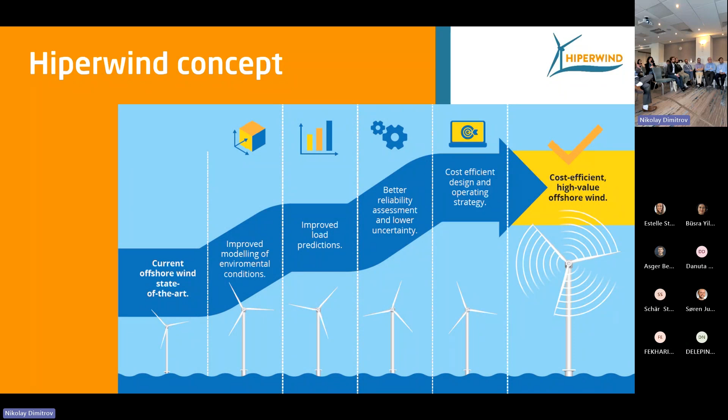And then based on that, you may want to see if you can optimize the design or reduce costs in other ways once you have managed to improve the modeling chain. So uncertainty is the key word, because in any of these stages you want to quantify and reduce uncertainty, or use the knowledge to improve the models that you have.

So when we say uncertainties, why do we think that it can lead to improvements in design? This is really the hypothesis; around half or even more than half of the project activities were based on trying to verify this idea or demonstrate how you can achieve this. We start by thinking that when you have high uncertainty, your design is penalized or suboptimal because in traditional design you need to use safety factors. The higher the uncertainty, the bigger the safety factor normally; that's the expression of uncertainty in traditional design.

Now, if you could somehow reduce this uncertainty, going from this black curve to the black curve with dashed lines, this could mean that you're more confident in your models and predictions. And because you're more confident, you know that you have sufficient reliability even if you allow yourself to have less material. This is one of the assumptions that we want to test and demonstrate. Can you enable the entire process that leads to verifying this and achieving this material reduction? A larger part of the project activities focuses on this.

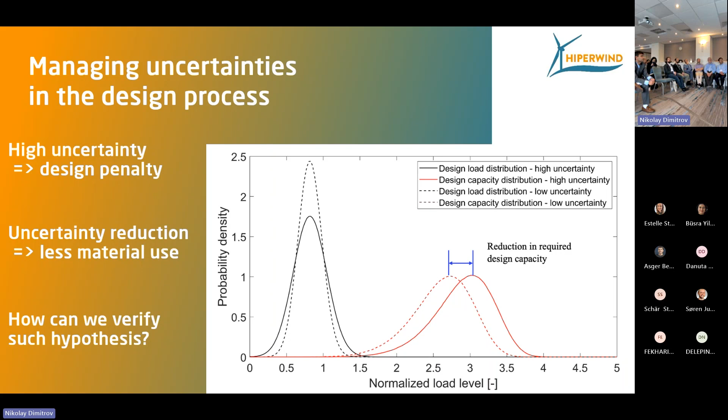And this leads us to the overall objectives. As I mentioned, it's really about reductions in risk and uncertainty, and we hoped this could lead to a 9% reduction. That was the estimate before we started three and a half years ago. You will see later today whether we achieved that; I'll keep this a little bit secret for a few more minutes. We start with environmental conditions, to achieve understanding and reduction of uncertainty in environmental conditions. Load assessment, the second part, has a similar objective.

Then we go to reliability computation, where we want to use the information from environmental conditions and loads to improve the way we compute reliability and use this to change the design. Since we have been looking at the structure and have more modeling capabilities, we also have objectives about optimizing costs, for example by improving reliability and changing the way maintenance is done. If you can predict the reliability of components, you may want to change the maintenance. To do that, you also need models for degradation of components, which was also one of our objectives.

And finally, it's nice to do all this exercise of claiming to improve models in different ways, but it's also very important to verify what we have achieved overall. This is the last objective: cost modeling, to verify whether all the project activities and potential new science really lead to the reductions that we expect.

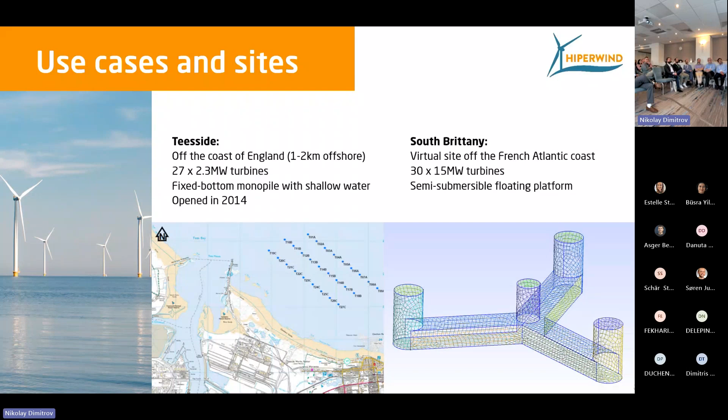Oh, that's the case. Yeah. Maybe the Teams is doing something.

All right. So the project had 6 technical work packages. The first one was on data acquisition and case study definition, and that's actually an important one. It was really useful in the later stages of the project. For example, we verified all our models against each other. We had these aeroelastic models: 3 partners had aeroelastic tools, and we managed to get them to show the same results. So later you can have much better confidence when you compare your actual results.

Then work package 2 was environmental conditions modeling. This was about multi-scale flow modeling from the atmospheric scale, mesoscale, down to the wind farm scale, and also looking at the data for the environmental conditions to provide inputs to other work packages, like the wind speed and wind condition distributions. Then we used this information in work package 3, where we did the loads modeling on wind turbine and wind farm scale, meaning you look at the wind farm flow level, like wakes, and then go into wind turbine loads. Then, having the environmental conditions and the loads, you go to work package 4, which was life assessment of wind turbine structures.

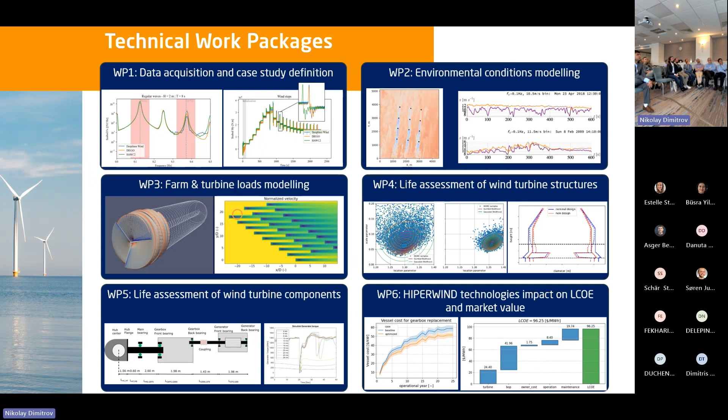So that was on the main support structures like monopile and tower, looking at the reliability of these structures. Work package 5 was on component level, for the replaceable components like drivetrains, bearings, but also electrical components, where we simulated different scenarios and developed degradation models and reliability models of replaceable components. And finally, work package 6 combined all this, first doing optimizations on operation and maintenance based on inputs from work package 5, and then cost assessment and impact assessment to combine all the results from the other work packages and find out if we really achieve the expected impact.

So it's been 3.5 years. Until now, that's been almost like 10 people working full time for 3 years on the project, in terms of the total number of hours people have spent. And our computers have spent even more time, this I can tell you, because uncertainty and reliability assessment is really computationally expensive, and also the flow models, of course. So there's been a lot of computations. Then we have, of course, had many deliverables, reports and publications. So where are we after these?

Let's say this amount of efforts. That's a very quick summary.

I would say we start with the cost reduction. I think we have actually got up to 20% reduction in material use based on case studies, based on existing wind farm sites, which could lead to, I would say, 5 to 10% reduction in levelized cost of energy, according to our colleagues doing the cost modeling.

Overall, I think we seem to get some very interesting results. And along the way, we've created some very nice advanced new science in terms of new methodologies and new tools, which you will see in the next minutes.

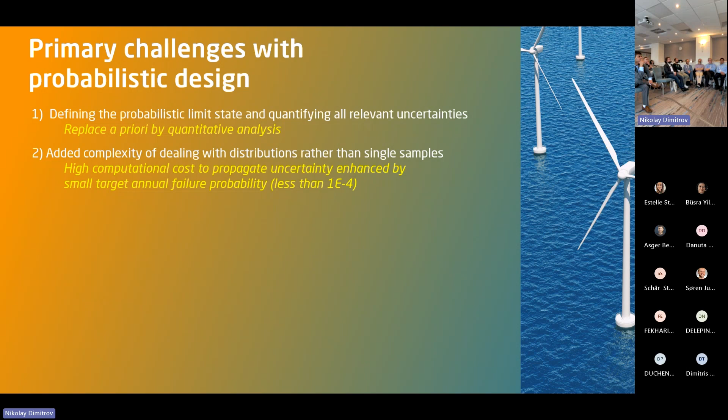Then we deal with distributions and not only single values. That adds another complexity in terms of computational effort, because characterizing the distribution requires more sampling or more calculations rather than just having a single value.

Third, when we talk about reliability, we also sometimes talk about rare events - what are the events that lead to failure? Characterizing these rare events, simulating or calculating them in a confident way, also needs additional efforts, and may lead to simplifications which could add some additional uncertainty.

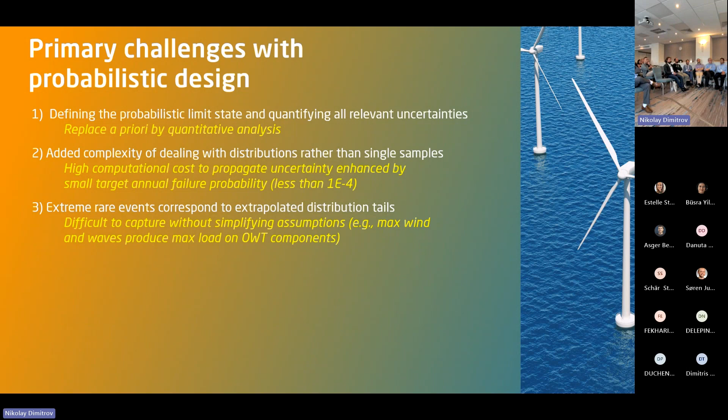So overall, some of the efforts in the project were really trying to tackle these problems. How do we do it? We start with the problem definition, where we try to establish these limit states of the modeling chain.

Then we want to quantify the uncertainties and say, okay, we have these different models that we need to use. Maybe there are alternatives - for a specific part of the design procedure you may have different model alternatives. You may want to quantify the uncertainties of different models and choose the best ones. So you make your choices.

Once you reach a stage where you know how to model the entire process, you still may need to make simplifications, because reliability assessment or computation of probabilities of failure takes more computational effort. So you do simplifications - reducing the number of variables by eliminating those that don't really matter, going for advanced sampling techniques so you converge quicker to your result, and finally using surrogate models, which could replace some more computationally expensive models.

Finally, once you have this reliability assessment in place, you want to update the design, or at least check if the design is adequate. That's the last step.

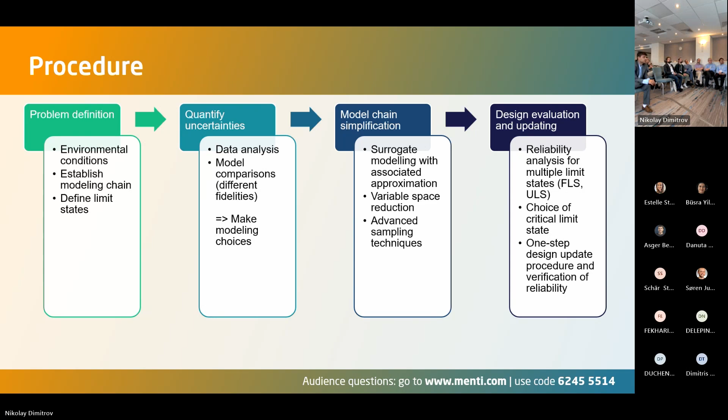What are the uncertainties that we actually looked at in the model chain? We start with the inputs, the stochastic inputs - that's the environmental conditions models. We look at the atmospheric conditions, that's wind, turbulence, shear, transients. Then the marine conditions - the waves, basically wave statistics - and the soil for the foundation, which was also, I think, a significant uncertainty.

Then, using these inputs, you start trying to compute design loads. For those you need again the climate and wind model taken from the environmental conditions, and you also need the wakes. Then for your load assessment tools, you want to look at aerodynamics, at least in hydrodynamics, and also any structural uncertainties. So all this is trying to look at what are the uncertainties in these models.

Then, in order to make the so-called reliability assessment, you need to also have the strength of your structure. So you need to have the distribution of the loads and the distribution of the strength, and you see how likely it is that they overlap, or that the loads are higher than the strength. So we also need some stochastic inputs in terms of the material or structural strength.

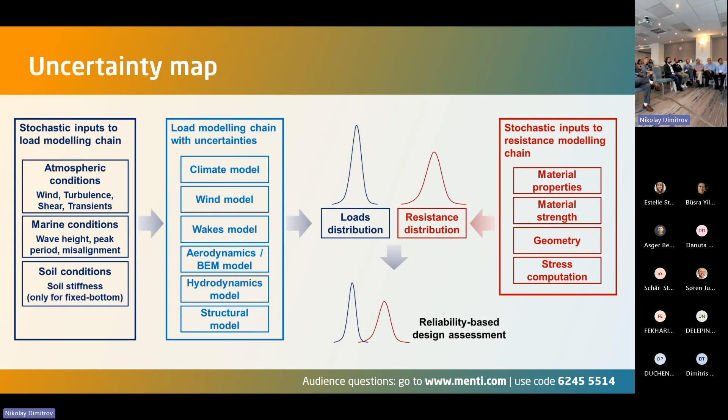You may notice there's less focus on the materials rather than the loads. This was a deliberate choice in our project, because you can't really do everything at once, and we wanted to limit the scope to something manageable. What we thought is manageable is focusing mostly on the loads and the environmental conditions.

Now let's go into the specific uncertainty quantification, and also how did we change the model chain? We did some improvements along the way, or at least we hope so.

Starting with the flow modeling, this was done mostly by University of Bergen. Unfortunately, Mustafa couldn't be here today, but we'll see a video from him later. So that's multi-scale flow modeling, going from the atmospheric scale down to the structural model, or to the aeroelastic response of turbines, also including some data assimilation along the way.

I'm sorry we don't have the time to go into multiple details, but we can always, I think, read our reports and contact us.

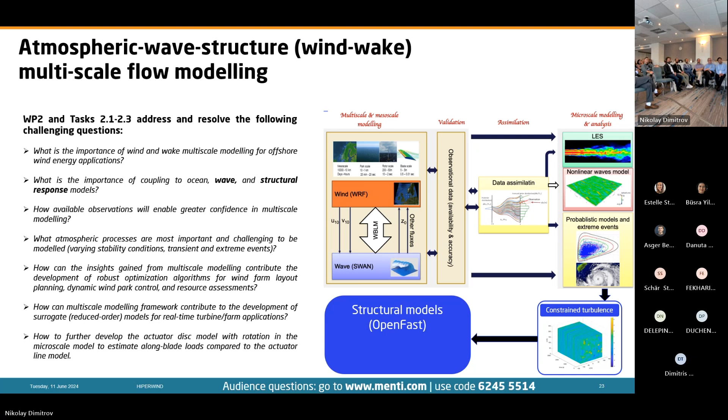I think there's something happening there again. Yeah. Oh, thanks. So, this is just an example. Let's see if it goes. Can you click on the video? This one, the red.

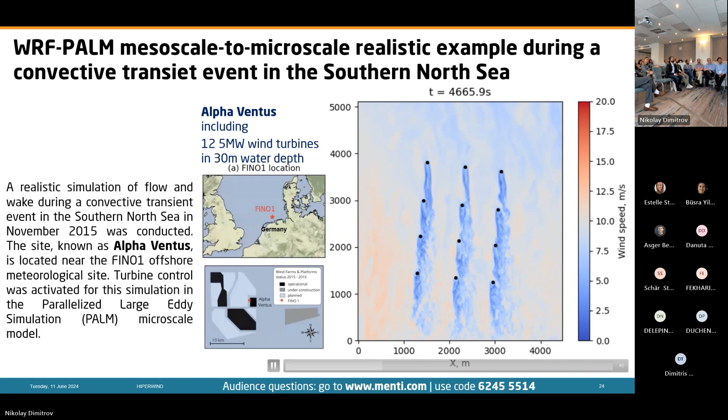Well, that's just an example, I think, of a specific event where we have a nice video of how this simulation goes. And in this event, you go actually through the atmosphere, then you zoom in into the wind farm level, then you solve the wakes. I think that's part of work package 2 that we had.

And then another part, which may look more trivial, or at least it's definitely less computationally expensive, but apparently not so trivial as we thought, is just getting the joint distribution of variables from data.

So that was also a bit of an eye-opener - it shows that sometimes subjective choices actually do come with an uncertainty. So even despite the data being limited or not, also some specific choices we need to take into account as uncertain. I think that was also one interesting result we kept in mind later in the project.

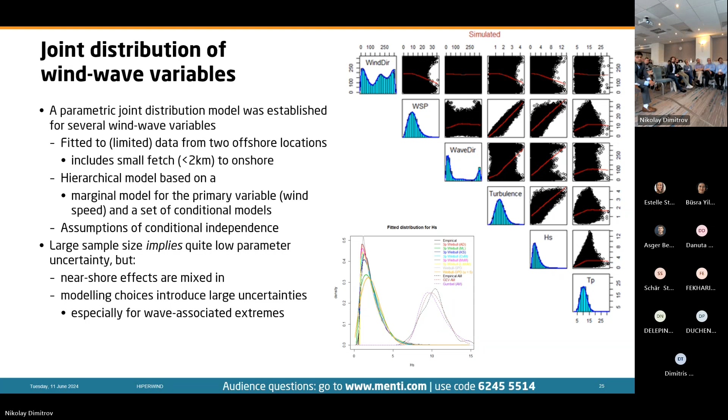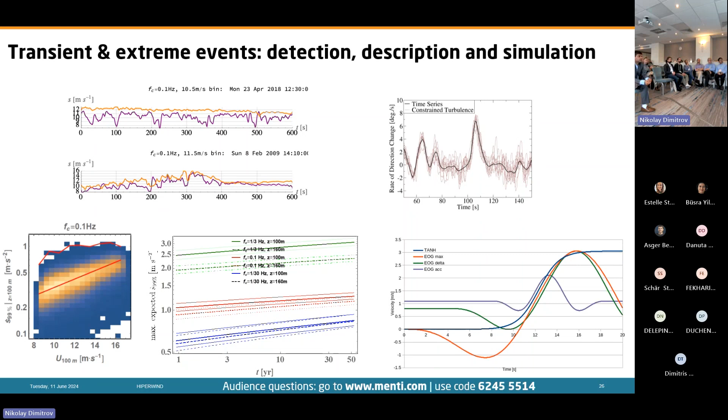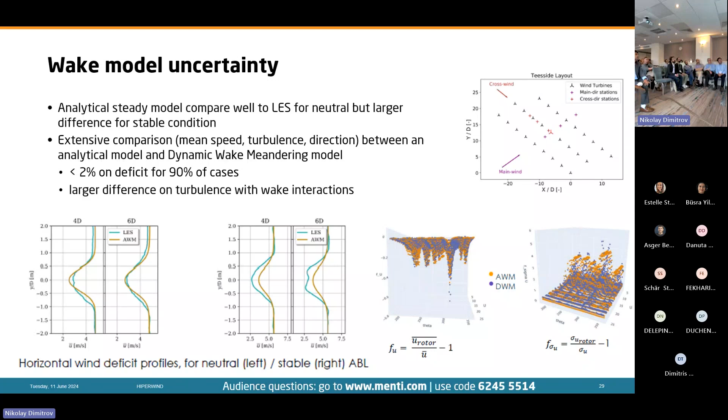Overall, the conclusion was that all model levels perform really well when looking at deficits, at single wind turbine deficit. When you look at wake interactions, like wake superposition, some models like the dynamic wake meandering model were not as clear - the results were not as good, so the uncertainty was higher. That was interesting again.

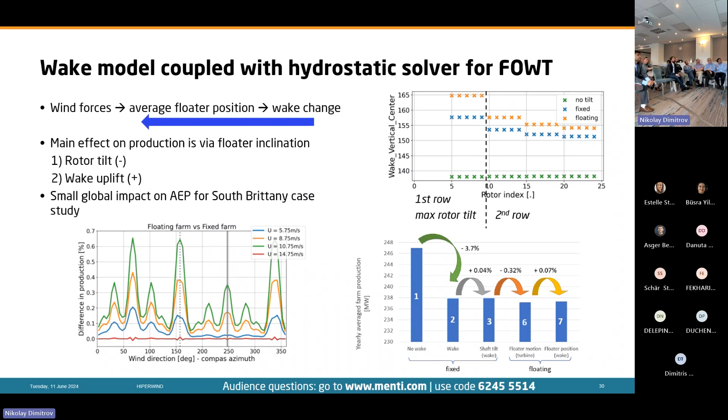Other uncertainties could be in the aeroelastic tools, like the blade element momentum method. This is actually a fairly simple model that has always been used in wind turbine design. Our partners from IFPEN were checking these results against Vortex, a higher fidelity tool, and despite being so simple, the blade element momentum method seemed to be doing quite well, especially for the smaller wind turbine case.

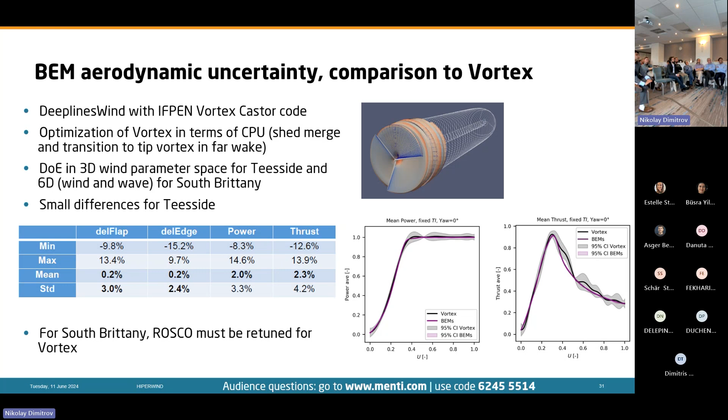Another thing is drag coefficient uncertainty - CEA was mostly working on that, and IFPEN, so that was CFD simulations. I think the main finding here was that the Morison simplified model doesn't seem to always be as accurate as we would hope for, especially for this drag coefficient.

In terms of making it easier to design floating wind turbines, we did a design evaluation framework - a Python-based framework where, if you have a certain design, you parameterize the floater design with a few variables, mainly the floater dimensions. Then a set of tools automatically generates the design description and the model inputs, so you can run frequency domain and time domain analysis to evaluate the adequacy of the design.

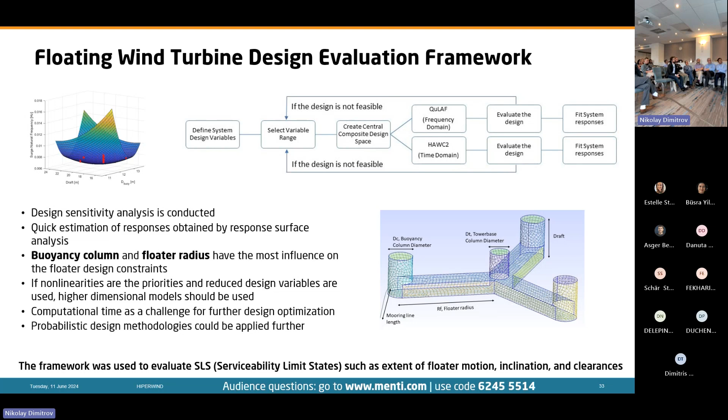For example, we were using it to evaluate the so-called serviceability limit states, looking at how big the floater motion should be allowed, how much pitch, blade-tower clearance, and blade-water clearance, and also to establish the allowable limits of motion of the floater.

Now, we've been doing a lot of modeling and looking at the modeling chain, and let's try to look a bit at reliability analysis - using these models to try to estimate probabilities of failure. This also means we need to look at some simplifications like advanced surrogate modeling, and also some more efficient sampling techniques.

First one, an interesting surrogate model where our colleagues from ETH were mainly doing it, is so-called dynamic. So actually making a model that can output simulated time series using input, in this case a turbulence box, and then just directly try to output time series, which is, in a sense, replacing the load simulation tools with a very simplified version, a much more efficient simulator.

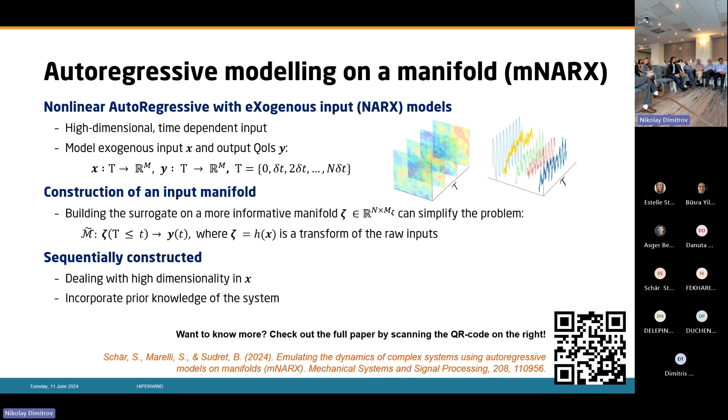In this case it's called a nonlinear autoregressive model with exogenous inputs, and it's on a manifold, so it's mNARX. It's sequentially constructed because you need to have this big turbulence box first. You go through a dimensionality reduction step. And I think maybe it's most fun to actually see how it goes.

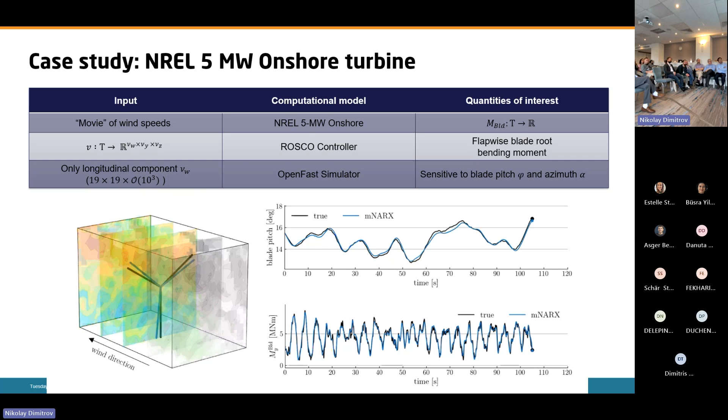Then we also looked at the Gaussian process as a tool. So sometimes you may want to train these surrogate models in order to replace some higher fidelity tools. But if you want to look at rare events, you may also want to consider finding a probability distribution. And if you want to also know the model accuracy, the Gaussian model is very nice because it automatically comes with an estimate of how accurate the model is where it's fitted.

So if you want to predict the distribution of a variable very much in its tail or somewhere in a very far area, what you can do is train several Gaussian processes on each of the distribution parameters of this variable, and do it sequentially a few times, so each time you train the process, you see where the uncertainty is highest, then add some points, enrich your design. So this was used to do this ULS, ultimate limit state reliability assessment. And this was a technique mainly developed by people from DNV.

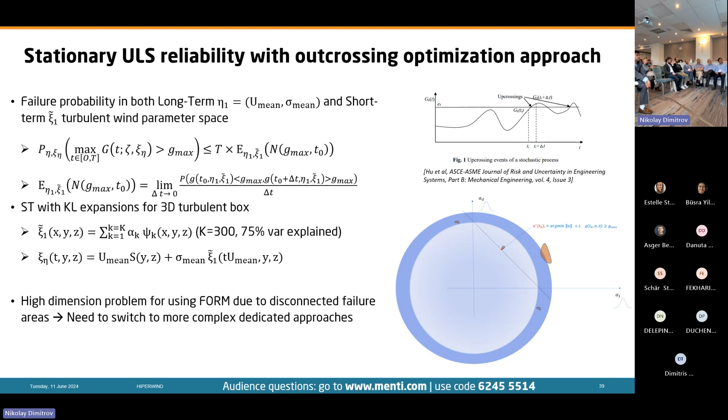There was also another technique that IFPEN attempted, which was this so-called outcrossing approach. The idea was again to find where the reliability will be lowest, or where it's most likely to get these failure events. In general it's a very interesting approach and potentially very efficient. In this case, we went in favor of the Gaussian process approach, because we seemed to have a disjoint set, which was a bit difficult to handle.

Anyway, we did the reliability assessment for the existing offshore wind farm case for ultimate limit state, and it turned out that this reliability is fairly high, so we actually had a lot of spare capacity. IFPEN did some further simulations, and it turned out that if we reduce the tower thickness and the monopile thickness by around 20%, we could still have a very reliable structure.

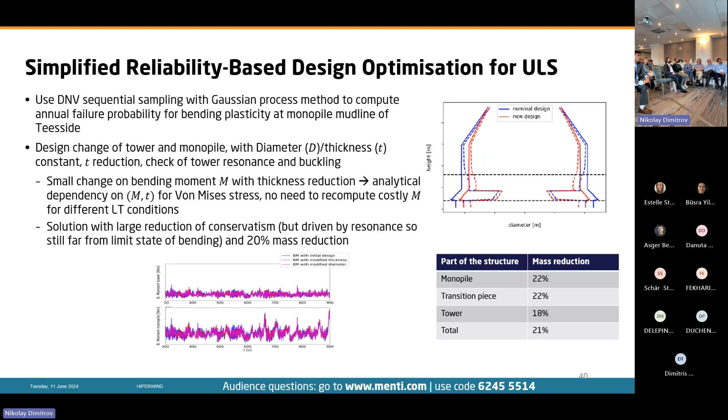In the end, we managed to reduce the mass of this tower and monopile assembly by 20%, and we didn't hit the stress limits or the buckling limits. The actual limit was the resonance or frequency criteria, because then you start hitting the same tower frequency as the rotational frequency of the turbine. So that's actually a nice result, right? We had some mass reduction.

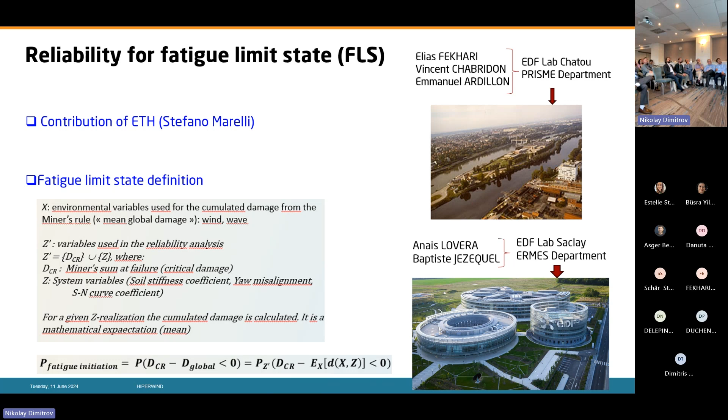But then we also had other limit states we wanted to check, not only ultimate limit state. We want to check also if the turbine can survive the fatigue limit state, and this was the job of mostly our colleagues from EDF. For the fatigue limit state, the most challenging part is that we need to make cumulative damage computation. While the reliability analysis itself is an iterative process, each iteration needs to accumulate again multiple estimations that cover the entire lifetime of the turbine. That is computationally demanding, so we needed to use some efficient sampling techniques.

The one we really focused on is called kernel herding. There's also a Python package now available about it. And in the end, there was also reliability sensitivity analysis, which attempts to find not only what is the reliability of a structure, but how important are all the factors that go into the reliability analysis. And it seemed that in this case, some of the material properties were the most important.

But overall, the end result from the reliability assessment of the fatigue limit state was that actually the ultimate limit state was more critical. So that's why we overall based this mass reduction and design improvement study on the ultimate limit state.

Yeah, so I think that's probably the last technical part. I hope you're still with us. It's about now looking at this component degradation modeling, and then also looking at all these results. Can we do some optimization and cost modeling and also an impact assessment?

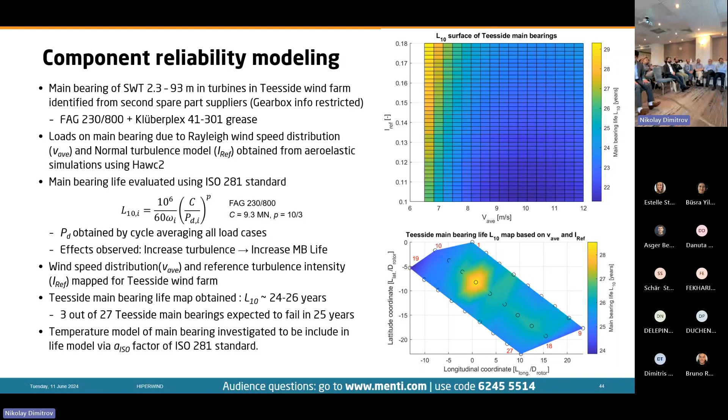But okay, so that's also one thing. When you have measured data, that's always what you get, right? This turbine has 20% longer lifetime than the other turbines, and I think that's maybe because there's some data issue that we actually still haven't exactly found, despite looking quite deeply into it.

Yeah. But these reliability models, apart from just telling you what the lifetime is, you can use to try to optimize your O&M activities. Because if you can estimate the reliability, how many failures per year you can observe, you can use this information to plan your operation and maintenance activities better. So that's what EDF did in this O&M optimization step.

I don't think we have it here, but you can see that, for example, mainly the vessel costs were down by more than 10% if you can do this type of optimization. And then this actually reduces the OPEX by about 5%. And this is now the overall cost reduction and where it comes from.

This was EPRI that did a lot of this work, and we look at the CAPEX, the capital expenditure. This comes mainly from the reduction in the mass of the structural components, and then also the OPEX, the operating expenditures, reduced mainly by avoiding some costly replacements of components in this O&M optimization. The main impact is actually the vessel cost, the main cost driver. So if you can spare some vessel trips, that makes a big difference. So the overall cost reduction is between 5 and 10%.

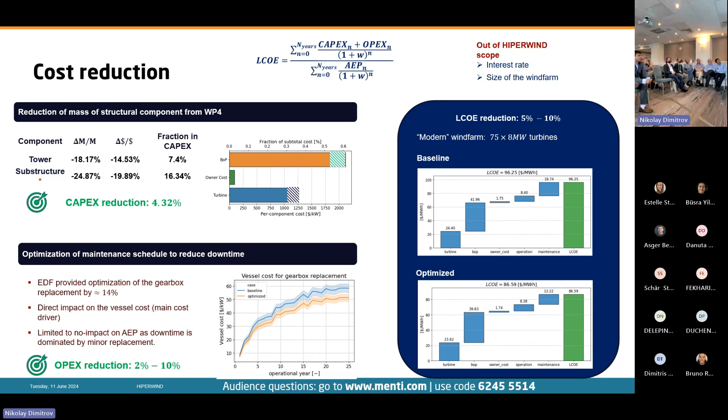And I'll go a little bit deeper into that in a second, which is, now let's try to summarize and see what other perspectives there are.

Oh, yeah. I don't know if these slides are somehow different than other slides. They make a difference. Here we are.

Oh, thanks. Yeah. So we have this impact of 5 to 10%. And I can just show you two figures here. This is what the impact would have been, from 185 to 175. So maybe that's a few percent, maybe 5%. And this is if the cost of capital was like it was when the wind farm was being built, when the cost of capital was high.

This is what it is nowadays. Nowadays, we have lower cost of capital. And in these lower cost of capital conditions, we get up to 10% reduction from the CAPEX and OPEX reductions. That's both interesting, but also a little bit discouraging. We do all this work, and then in the end, the capital is really the one that gives a huge impact.

But overall, I think that's also some confirmation. I think we have always known that the financial conditions really are important. But nevertheless, under the current conditions, we expect to have around 10% reduction in the levelized cost of energy.

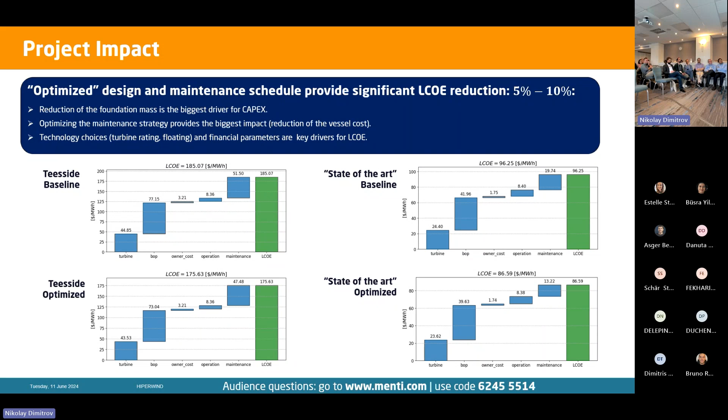This is also another thing just to mention: this is actually a wind farm which is more than 10 years old. We certainly hope that the community until now has also managed to get some of these cost improvements already. But if not, then at least we know where some of the best potential lies.

Then also there's a few other things as an impact from the project or how we want to follow up. One is these standards. For example, these gust definitions, which are some of these synthetic gust definitions. That's something we would like to introduce in future standards. And one of the potential standards is this 61400-9, which right now is a technical specification on probabilistic design.

Yesterday we heard at the conference someone asking, what do we do? Is there a standard on this probabilistic design? And there is actually at least a technical specification. But I would say it complements these project results, because this technical specification is very formal. And here I hope you've seen a few practical details of how we can do some of these activities.

So to conclude, I hope you are convinced that we've shown you some examples of how we can look at design under uncertainty. But also along the way we saw some pieces of science, each of them worth something by itself, like different wake models or different uncertainty quantification tools. Also we see that understanding uncertainties will lead to design improvements.

That's what we think. But one more important note: I wouldn't claim that the entire mass reduction you see in this design is only due to using probabilistic versus deterministic design. Part of the story is that we had considered everything together. So we had the entire design process integrated in one organization, or at least in one team.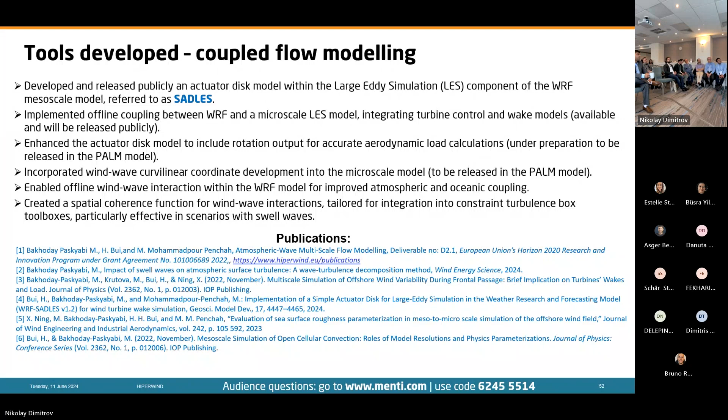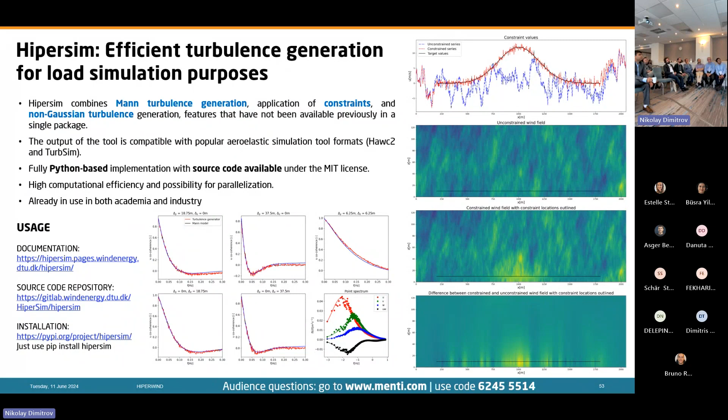Then there is another tool called HiperSim, which is doing turbulence generation. That's maintained by DTU. It's efficient turbulence generation, including constraints, so you can add some measured data points in it. Also non-Gaussian turbulence. And this is in Python. And then we have this perspective to put together this cost modeling tool. I don't know if that's already ready or soon will be. It's useful to have a more open cost modeling tool also in Python.

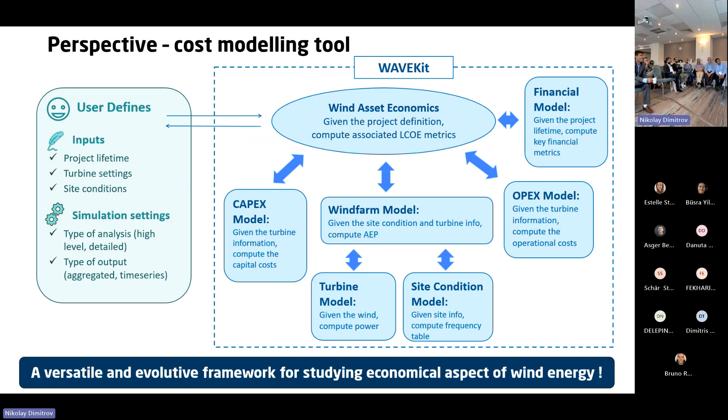And now let's go and check if anyone has already asked any questions.

I think now let's use a few more, just a couple of minutes. I can see there's a couple of questions, and then we will anyway move to other parts of the presentation, and then we can have more open discussion. But maybe that's just one question that we can check.

Can you speak more about the use of GPs? Were they trained on observed data or simulated data? I can maybe take it. I don't know if anyone wants to elaborate, but maybe I can try. We used GPs in different aspects of the project. The first use was in order to compare some simulation tools of different fidelity.

Typically, as you mentioned, Nikolai, when we wanted to estimate the model uncertainty, the idea was to compare some design of experiments that were relatively dense in terms of parameter space for the engineering tools, and to try to define the gap between them and the high fidelity tools, typically between engineering wake models and LES, for instance. And the interpolation is done, of course, by Gaussian process, which provides the benefit to quantify not only the mean, but also the uncertainty in the whole space. So this was the first usage of the Gaussian process.

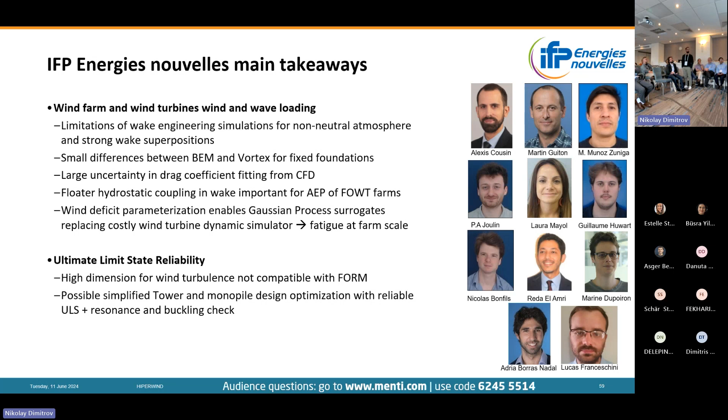Then we have EDF, and we have both Emmanuel and Subang here. And I always want to... Okay, I will talk first. I think as well, yeah.

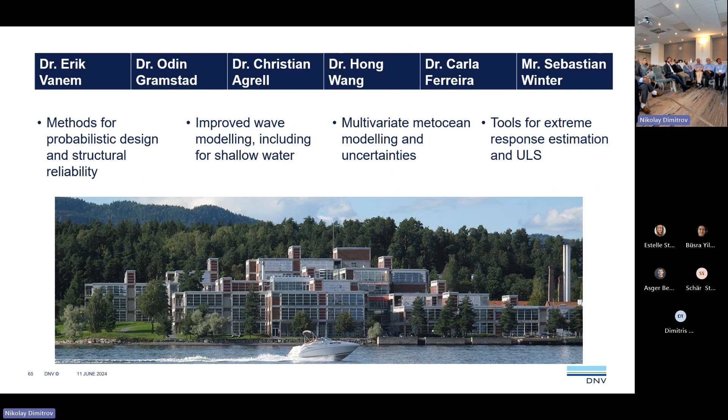For the sake of Erik, I could explain who the other colleagues from DNV are that were working with us. That's also Odin, Christian, Hong, Carla, and Sebastian, and they've been working a lot on ultimate limit state estimation tools for extreme response estimation. Erik himself was doing a lot of work on the joint distributions, while the others, mostly Christian and Sebastian, worked on Gaussian process models.

I think we also have a video from Erik.

Hi, my name is Erik Vanem, and I'm a research scientist at DNV. We are very happy to have been part of the Hiperwind project. Together with several of my colleagues, I've had the pleasure of working with highly skilled researchers from the project partners on challenging and relevant problems related to offshore wind. We have developed and gained experience with generic methods for probabilistic design and structural reliability assessment for offshore wind turbines, including how to account for uncertainties in various parts of the modeling chain.

Some of the specific project outcomes that are highly relevant for DNV are computationally efficient tools for long-term extreme response estimation and ultimate limit state assessment, improved tools for wave modeling including shallow water effects, and probabilistic multivariate models for metocean conditions and associated uncertainties. These competences and tools are not only relevant for offshore wind but could be applied to other marine structures.

We will continue to work on these methods and tools to further validate them and possibly include them in our recommended practice and future services. We believe this to be useful not only for DNV as a company, but to the ocean and offshore engineering community as a whole. We also hope that by being part of this very interesting research project, we have made a small contribution to promote offshore wind as a viable and clean source of energy for the future.